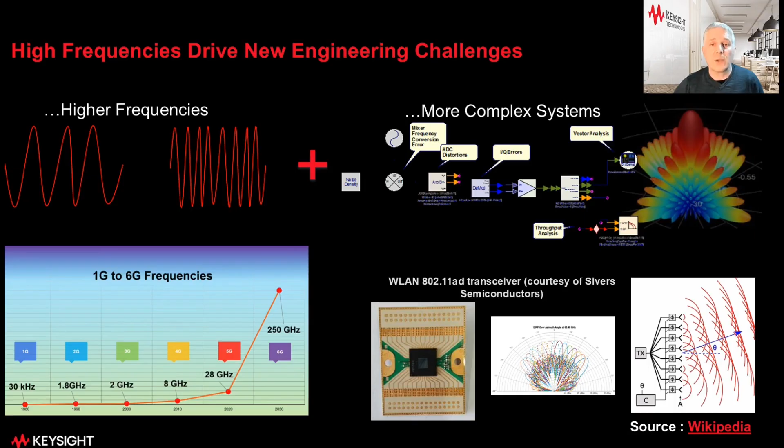As RF design moves into the sub-terahertz and sub-millimeter wave domains, we gain access to massive bandwidth and faster data rates. At the same time, engineers like you face tougher challenges. At these frequencies, electromagnetic behavior becomes more complex, thermal margins tighten, and integration across domains like system architecture, RF design, and thermal design is critical. To meet performance demands in smaller footprints, the industry is rapidly adopting 3D heterogeneous integration, or 3D-HI, an example of which you can see in this picture.

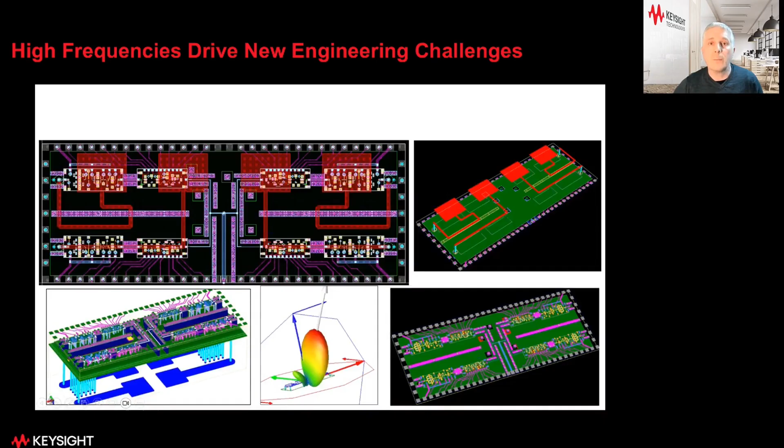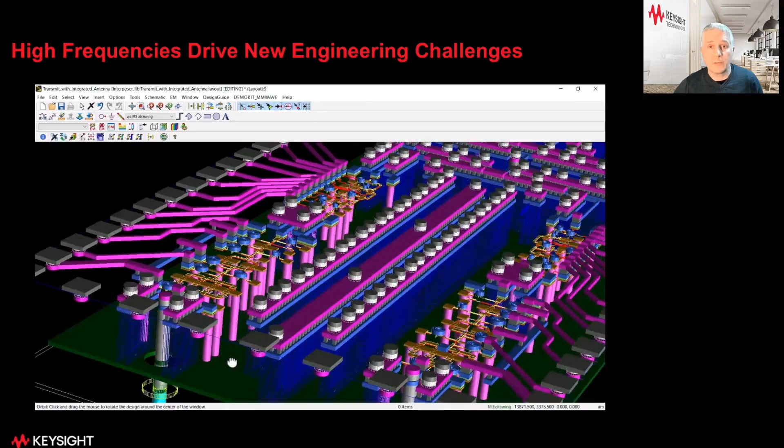This method combines RFICs, MMICs, advanced packaging techniques, and PCBs, often coming from multiple design flows. This enables compact, high-functionality systems, but also makes design, simulation, and validation much more difficult. As integration density increases, parasitic effects, coupling, and instability risks also grow. Electrothermal interactions impact both performance and reliability, especially in systems like satellites where physical access is not possible.

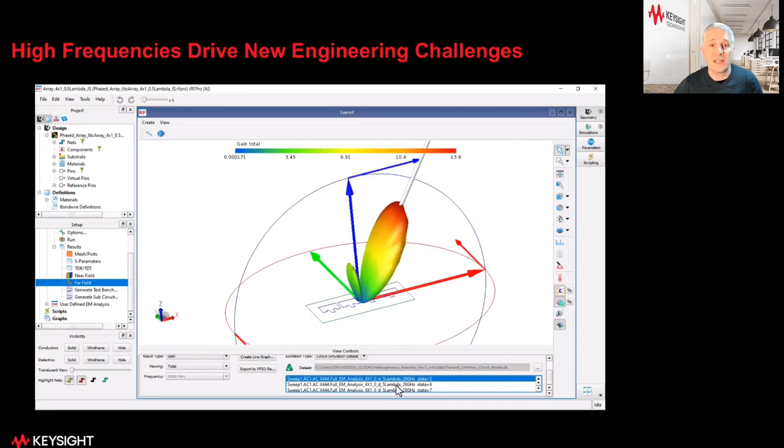Designers must now meet multiple targets, including gain, stability, EVM, ACLR, and thermal safety. They also need to comply with evolving 5G and 6G standards. This requires multi-domain simulation and large-scale optimization across electrical, thermal, and mechanical domains. Traditional methods often fall short. This is where intelligent automation and workflow orchestration can make a real difference, because these challenges are not just technical. They affect how teams work.

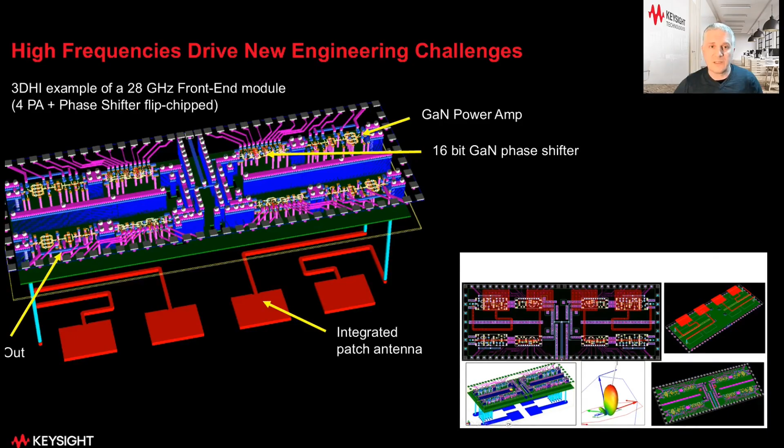To meet today's design requirements, engineers often rely on multiple disconnected tools, which adds complexity, increases the chance of errors, and slows down development cycles. To better understand this reality, let's look at what designers themselves are saying. As you can read on that chart extracted from a survey Keysight conducted a couple of years ago, a lot of the designers are using multiple tools to design their IPs. 6 out of 10 use more than 5 tools.

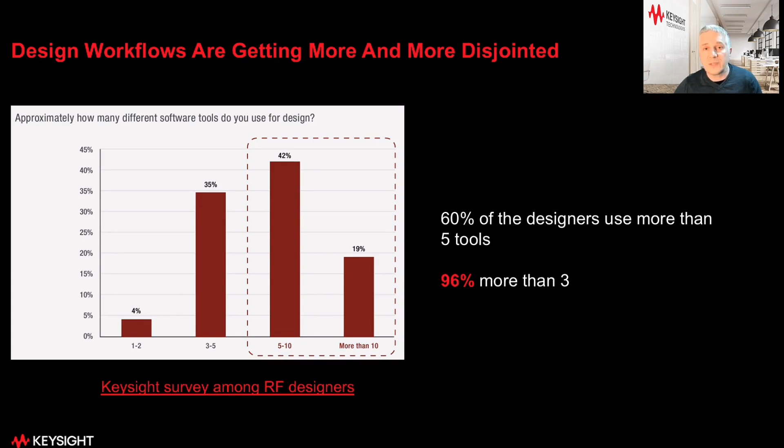That leads to a common challenge that the image below illustrates clearly. Many high-frequency design teams work in isolated environments. RFICs, MMICs, analog blocks, and PCBs are often developed using different tools, each with their own data formats and workflows. While these workflows work well individually, this fragmentation limits collaboration, complicates reuse, and increases the risk of errors or inconsistencies, especially in complex 3D-HI systems.

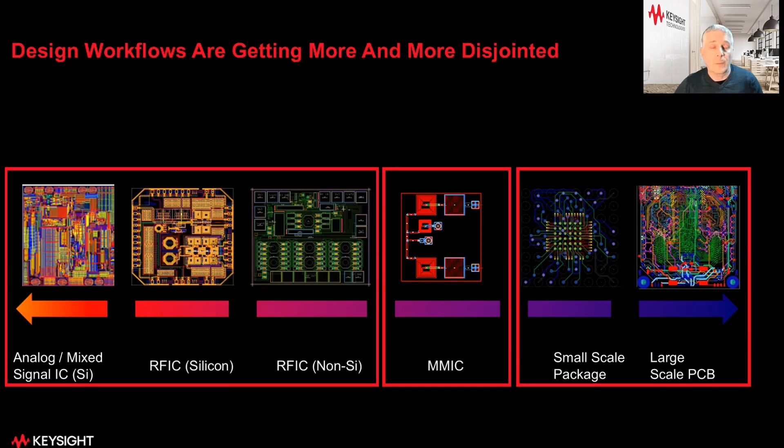This fragmentation is precisely why we created Nexus. Nexus is an integrated simulation and optimization platform tailored for RF and high-frequency design and simulation, built to unify multiple design environments and streamline complex workflows. Nexus tackles these challenges by providing an integrated, cross-platform environment specifically designed for RF and high-frequency simulation.

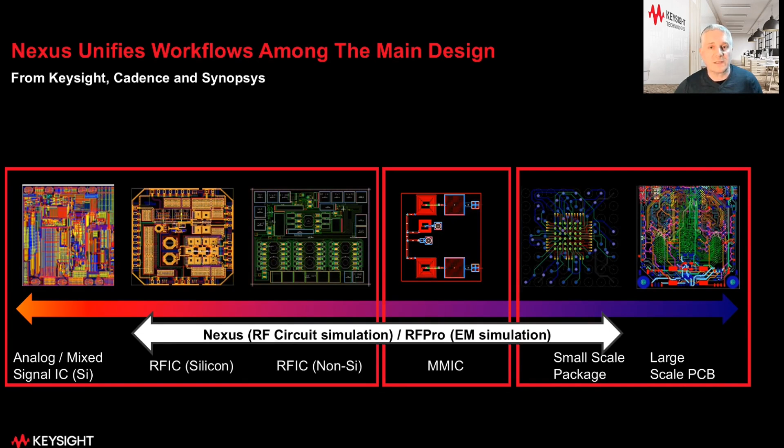It unifies disparate tools and workflows into a single platform, enabling teams to collaborate more effectively and streamline their design process. With Nexus, you gain the power to simulate and optimize across domains and design flows without the friction of incompatible data or tool chains. Now that we understand the motivation behind Nexus, let's explore its core innovation, a user interface that seamlessly connects your existing tools and workflows.

First, one of the most valuable features of Nexus is its native integration with the industry's leading EDA platforms, Keysight EDA, Cadence Virtuoso, and Synopsys Custom Compiler. The user interface and workflow remain consistent across all 3 environments. This means engineers can work in the tool they prefer while still collaborating smoothly with colleagues using different platforms. It eliminates the need to translate workflows or retrain teams and enables better collaboration between RF, analog, and packaging teams.

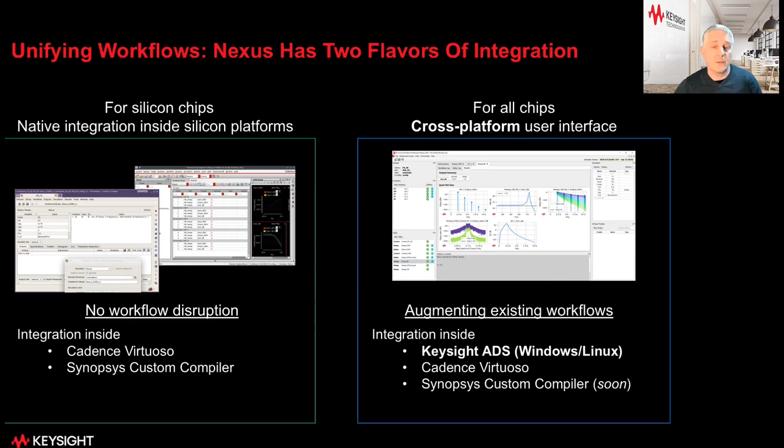Nexus is available in 2 complementary forms, mainly for Cadence and Synopsys Custom Compiler. The first form is native integration within Cadence ADE Explorer and Synopsys PrimeWave, allowing teams to adopt Nexus directly in their existing workflows.

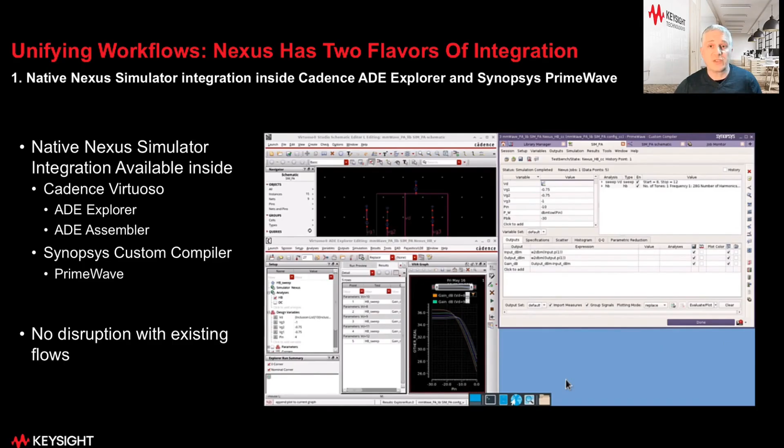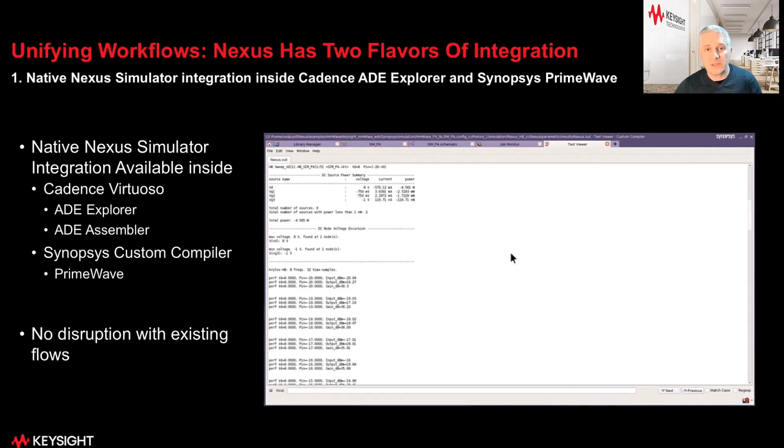As you can see in the video below, Nexus can be used with Cadence Virtuoso inside ADE Explorer on the left and Synopsys Custom Compiler inside PrimeWave on the right. You simply switch to the Nexus simulator and use these tools as usual, with no change to your workflows. Simulations run within these platforms. You can check the log files, you can get the Nexus results, even with the Keysight data display if preferred, as shown here in Custom Compiler.

The second form is a modern user interface that can be launched from within the same environments and also from Keysight EDA. This interface enhances traditional workflows with dedicated RF-centric tasks, providing advanced capabilities while remaining fully compatible with existing design practices. For ADS users, an important change is that simulations are no longer configured directly on the schematic. Instead, all simulation setup and control happens through the Nexus interface.

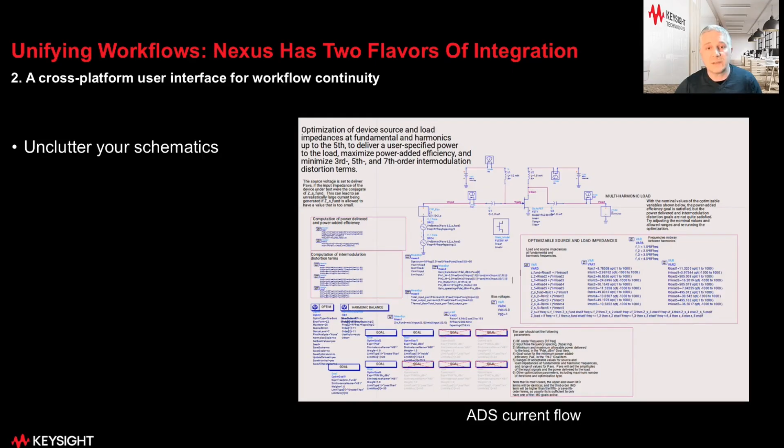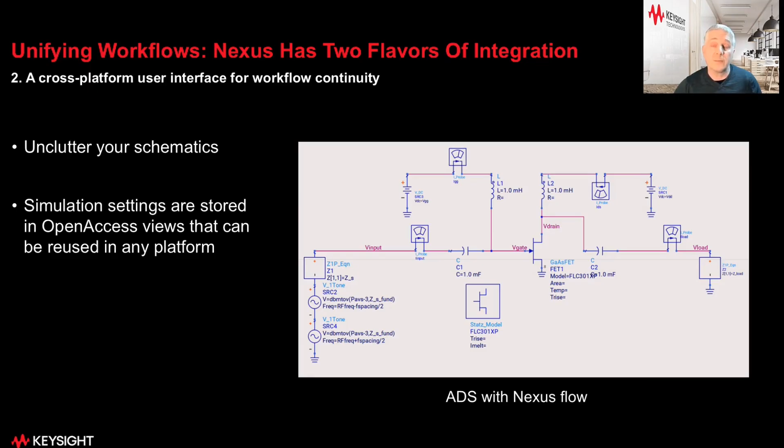This approach declutters schematics, keeping them focused on circuit topology, while making simulation parameters and sweeps easier to access, manage, and reuse. It also encourages cleaner design organization and improves overall workflow transparency. Importantly, it helps ensure that designs created for one platform can be reused on others by avoiding platform-specific components used only for simulation.

Nexus also offers a flexible solution for creating views that can be generated on one platform, such as Virtuoso, and reused seamlessly in ADS, as you can see in the video below. I created a setup in Virtuoso that I can reuse or modify in ADS and then reuse again in Virtuoso. Same user interface, same views, just a choice of preferred platform.

So how does that benefit you? For example, an IC design in Virtuoso on the left can be simulated with the same setup and simulators when the IC is brought into the package in ADS on the right. Or it enables simulation of two ICs, one made with silicon technology within Custom Compiler, for example, and another made in III-V technology using ADS.

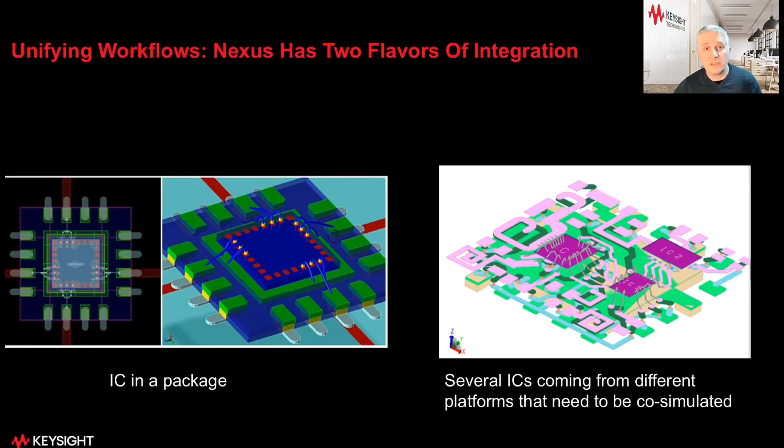Nexus is built for seamless integration across major EDA platforms, allowing teams to work in their preferred environments without losing efficiency. By enabling the reuse of views and data across tools, it supports consistent workflows and simplifies collaboration, especially important in RF-centric design, where continuity is critical.

In short, Nexus unifies simulation and optimization into structured, reusable workflows that reduce setup time, minimize errors, and standardize processes across teams. Now, with this foundation in place, let's explore how Nexus enables powerful multi-domain simulations to provide deeper insights into your designs.

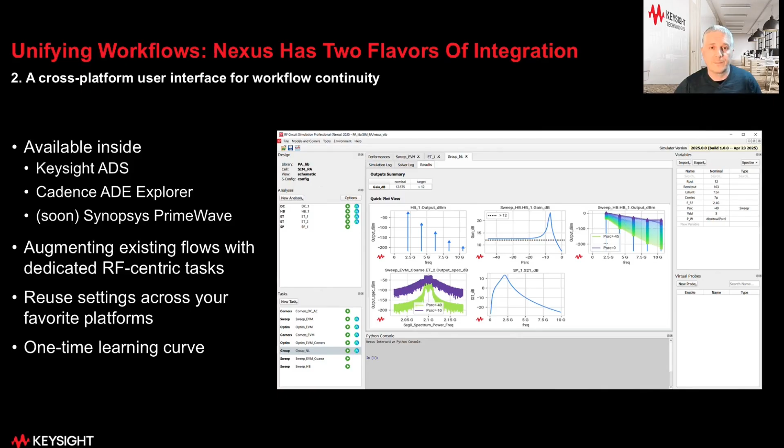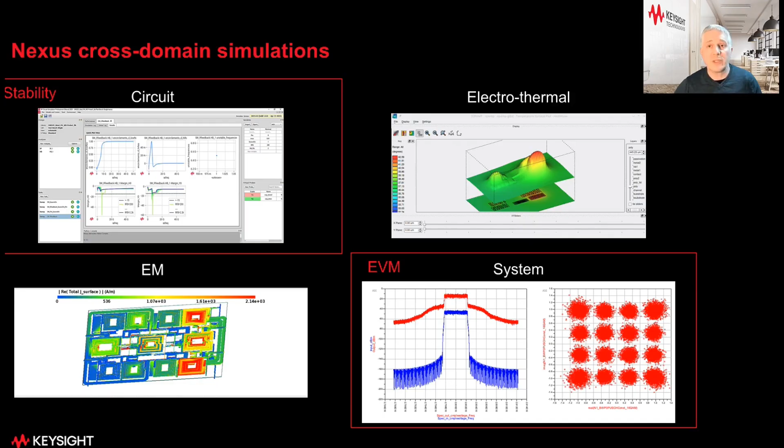Nexus supports electrical, EM, and thermal simulations, enabling comprehensive analysis across all relevant physical domains. For example, the platform can simulate and optimize important circuit-level metrics such as gain, power efficiency, nonlinear stability, as you can see on the image, EVM, and ACLR. Let's focus on two of these in a demo that we believe will be a great addition to your workflows: stability and modulated signal simulation.

We'll start with stability. I won't go too deep into why stability is important. There are many methods to help you determine if your design is stable or not. And that is also the problem. Which method should you trust? And which one provides real insights?

For several years now, we have introduced the Winslow probes, named after Dr. Tom Winslow, who authored numerous papers on stability. These probes are, of course, part of Nexus, with a new and unique addition from Dr. Winslow's papers that I'm sure you'll appreciate. For the demo, I'll go full screen for better clarity, so let's start.

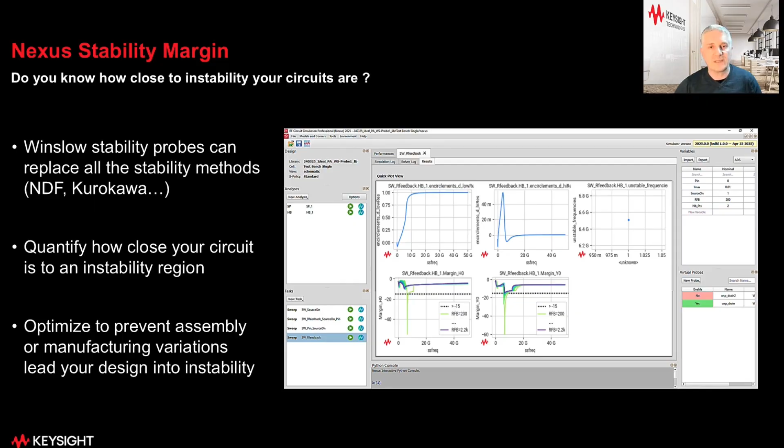Okay, so for the demo, let's analyze this simple circuit. It's a transistor mounted in an amplifier mode, in which we have inserted a feedback resistor between the drain and the gate, and we'll sweep the resistor value to see if the design is stable or unstable for different values of this feedback resistor.

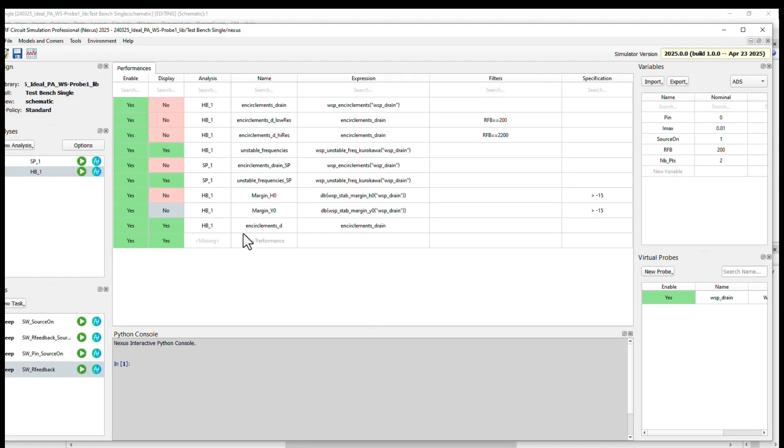So let's start Nexus on this design and maximize it. In that case, we'll look at the sweep of this feedback resistor, so 10 values between 200 ohms and 2.2 kilohms.

So let's run the simulation, which will use the Kurokawa method of stability and the Nyquist stability criteria to detect any potential instability in that design. That's running all the analysis on 500 stability points, and that detects one unstable frequency using the Kurokawa method, and the Nyquist criteria, so the number of encirclements around the -1,0 point.

We see that for one specific value, the lowest value, we get to 1, so there's one encirclement, so the design is unstable, which is basically also what the Kurokawa method gets here with this 6.5-ish frequency being unstable. So that's fine. We know that it's unstable for this specific resistor, stable for the others, but how stable that is?

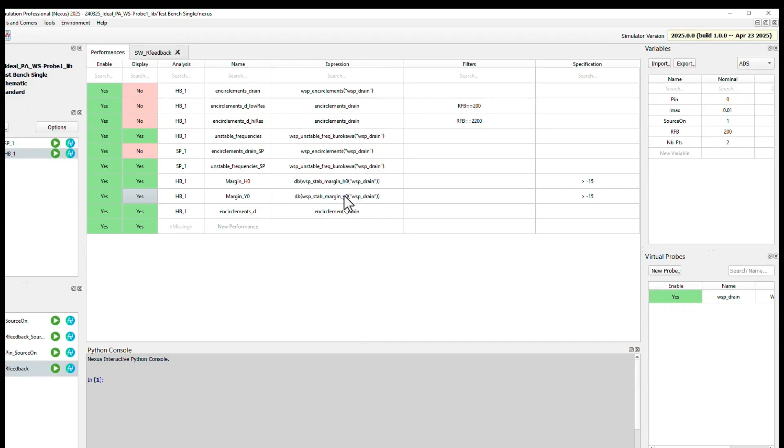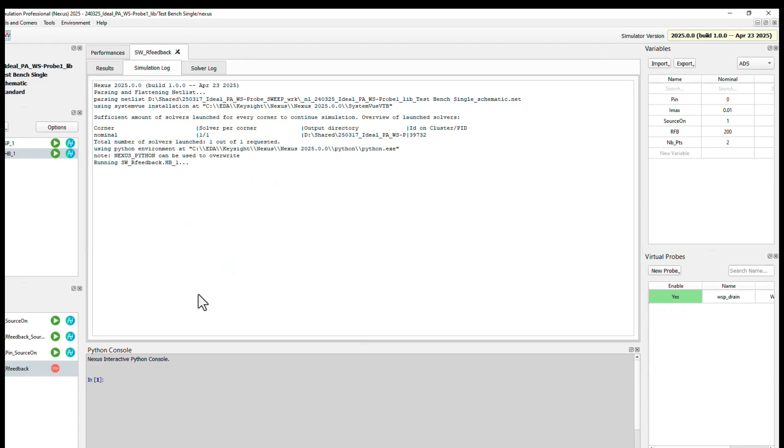In Nexus, you can activate the new computation based on Tom Winslow's work on the stability margin, where you can compute in driving point impedance and admittance the margin that you have for this specific stability. So instead of saying it's just stable or unstable, that will tell you if it's stable and how close you are from an instability.

So here we are, the same kind of curves that we have here, except that we now have two more curves, the stability margin for the impedance. And you can see this greenish huge peak that corroborates that it's oscillating, which you can see also on that area. But we kind of estimate that above -15 dB, you're normally pretty safe in terms of stability.

That depends on plenty of things, but that should be pretty safe.

And you can see that for some other values, though this method is saying it's stable, it's very close to instability. You can see here that you're below that, and some of them are also below that in the admittance version, which means that if you add process impairments, if you add some assembly variation in the manufacturing, there's a huge possibility that what looks stable will probably join that curve and be unstable.

So that gives you a quality measure of the stability. In Nexus, you can now get this kind of subtlety between stable or unstable. It's stable, but then probably that needs to be optimized to get more margin to avoid any process impairment that you can have, making your design finally unstable instead of stable.

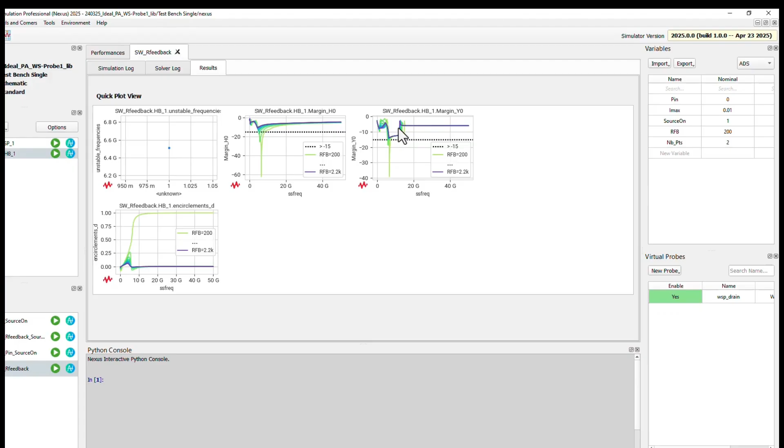Now that we have covered stability, one of the other gems in Nexus is the virtual test benches, which let you see how a device reacts under real-life signals. Why is this more beneficial than classical IP3 or IPN tests?

Latest modulation standards have peak-to-average power ratios greater than 15 dB. Yes, 15. Better to avoid approximations.

Within Nexus, you can embed this test seamlessly and quickly get the system metrics you need to focus on and even optimize, exactly as if you were plugging Keysight instruments inside your design platform, with the same fidelity since the code is leveraged from our own instruments.

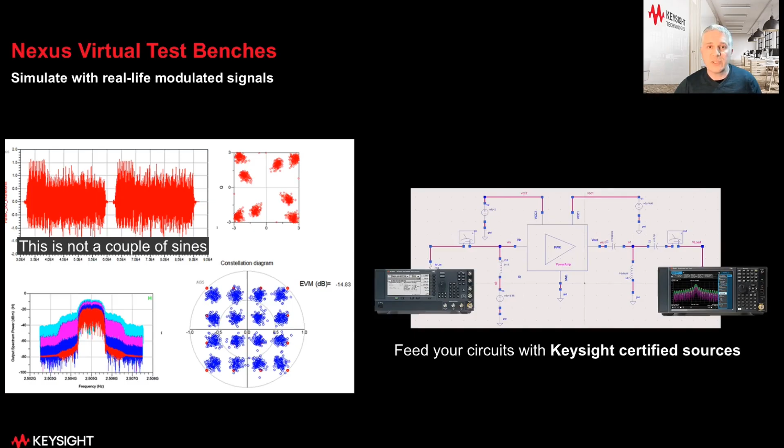I'll now switch to show you how this works in real life in Nexus.

So for this demo around modulated signals using virtual test benches in Nexus, we will use a power amplifier that operates around 2 GHz, in which we will virtually replace this RF input, which is a classical continuous wave input, with a WLAN and a 5G signal, and look at the data here at VLOAD, where we will compute the EVM, the spectrum, and the constellation without touching the schematic.

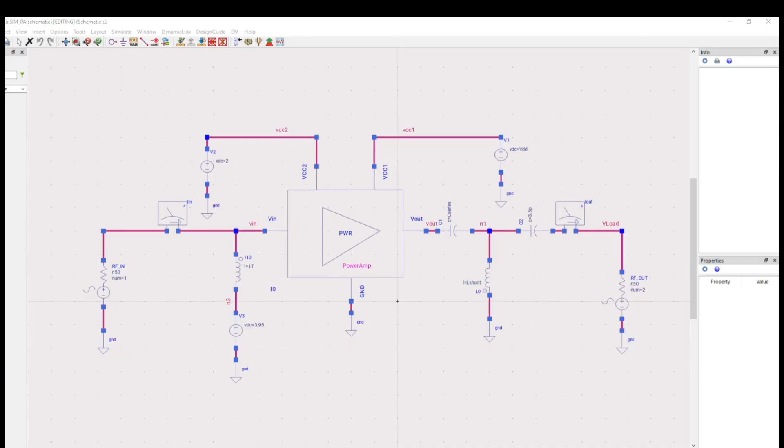So to do this in Nexus, we will run envelope simulations. Envelope is the only algorithm that can handle complex signals, and modulated signals are complex. So we will look at the 5G one and edit the 5G.

So it's basically like if you were putting, instead of RF in, a Keysight source, here a 5G one, and if you were plugging inside the schematic at the VLOAD node a Keysight spectral analyzer, that would be equivalent because we leverage the code between the software and the hardware. So you can change as many parameters as you want for this standard.

The only things that have changed here are the input and output frequency, and the input power, which are the variables I'm using in Nexus, along with the modulation, in that case 64 QAM. So I use the same input and output, though you can use different ones if you're not using something like a PA, for example a transmitter or receiver. If I'm validating these two, I will run the two simulations, WLAN and 5G.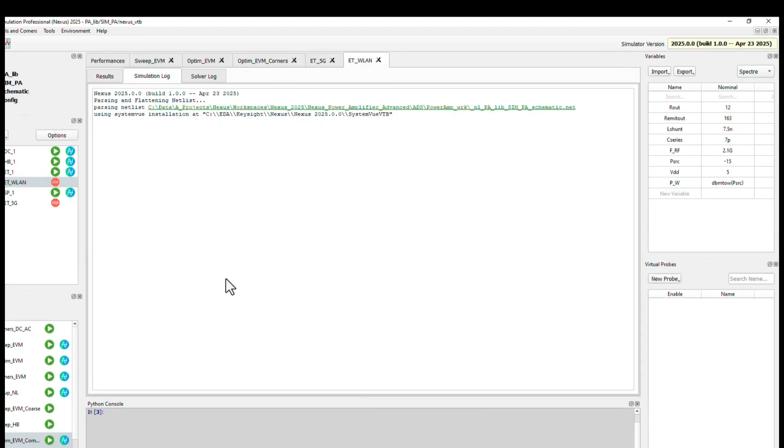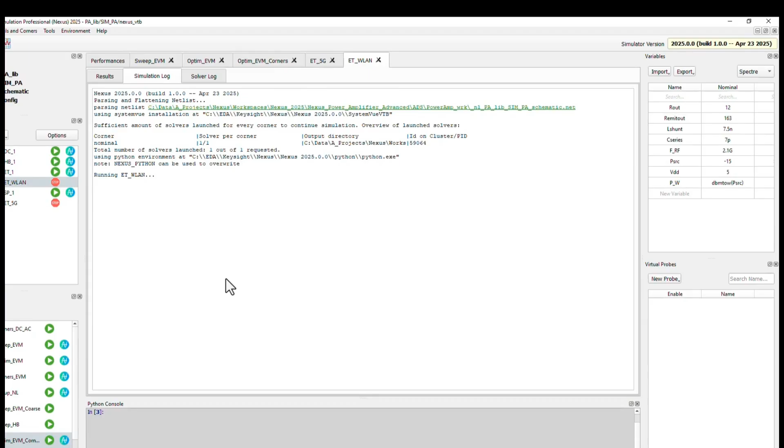WLAN is set up the same way. We are launching SystemVue, our Keysight system simulator, in the background. It's embedded in Nexus, so you don't need an external installation for this, it's already there. Then at the output of these two simulations, we will look at the performances I've defined, an EVM and a spectrum, for each analysis.

So here's the one for the WLAN and the 5G. The data frame is a little bit longer, but should come anytime soon. You see it's okay, quick enough - almost 13% here with a spectrum that is a bit noisy.

And for 5G, it's 10%, which is a little bit cleaner. 10 and 13%, so that means it's very difficult to say we have one EVM simulation, which corroborates the slides I was showing about how dependent it is. If you're using an IP3, IP5, or even IP9 computation, that's an approximation, and these values can range quite widely depending on the type of modulation in your circuit.

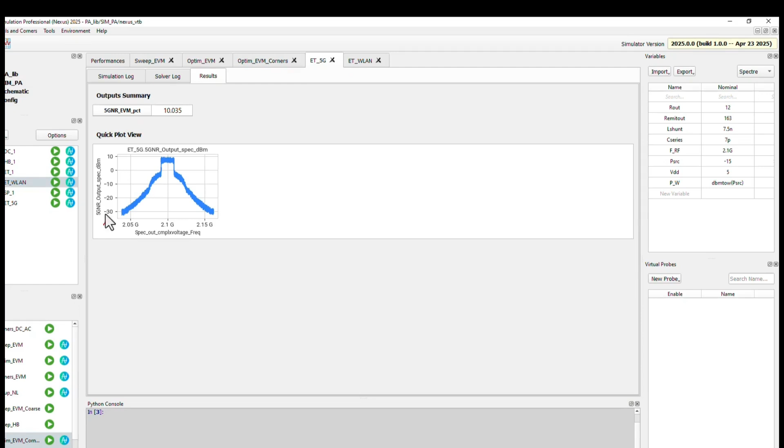Of course, it's a performance, as I mentioned, so if it's a performance, you can sweep it, you can optimize it. Here I did that for DC, S-parameter, and envelope at the same time to get better performances. If you have corners, you can do that on corners as well.

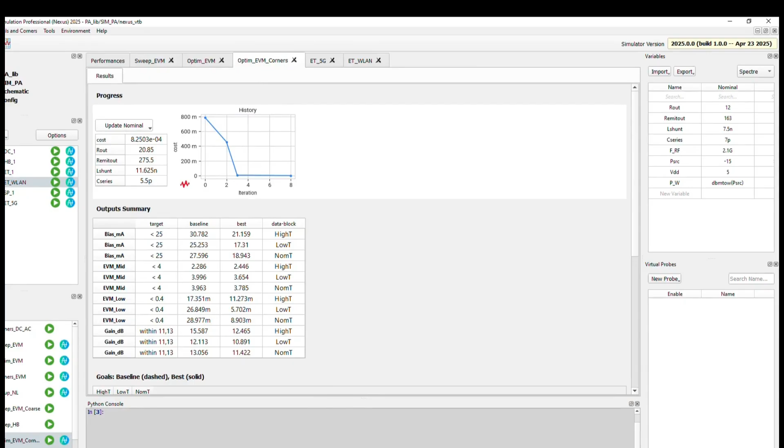But of course you can see much more than this if you want. SystemVue computes a lot more data than you are seeing here, so you can use this and optimize or simulate anything that SystemVue has stored. The EVM I was using is just an example. That's a very quick demonstration of what we can do for modulated signals inside Nexus.

And I will now switch back to the slides.

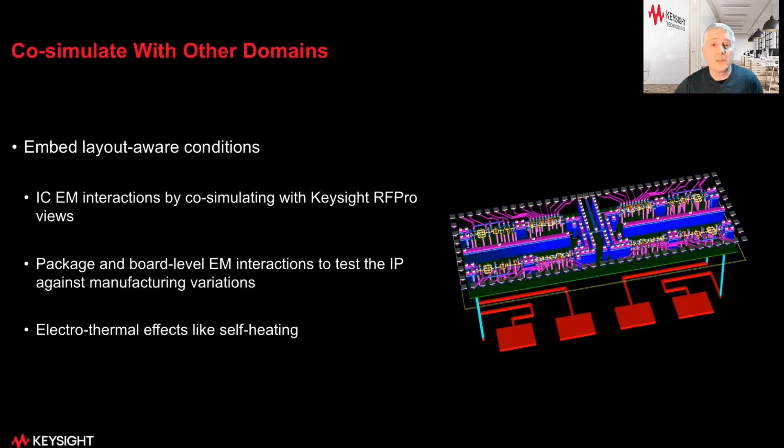On top of these nominal simulations, Nexus can also incorporate environmental and layout-aware conditions, such as IC-EM interactions, where Nexus can co-simulate and co-optimize with EM views generated by Keysight RFPro, package and board level EM interactions to test the IP against manufacturing variations, or self-heating, which you can see running in this embedded video.

For this case, we're looking at an operational amplifier created in Cadence Virtuoso, on which we want to compute the electrothermal profile induced by the layout.

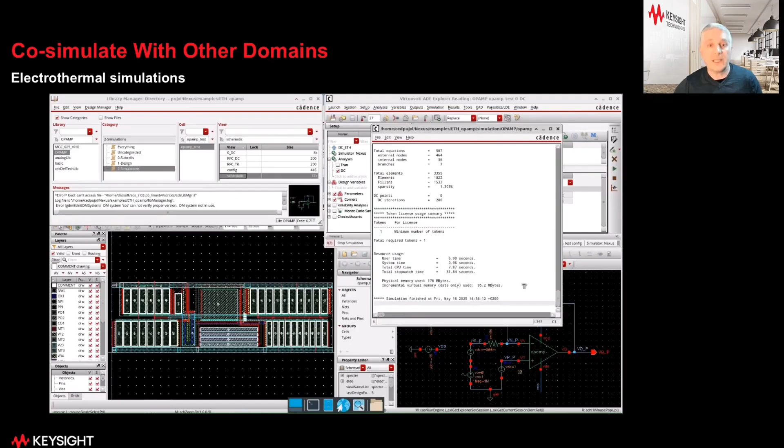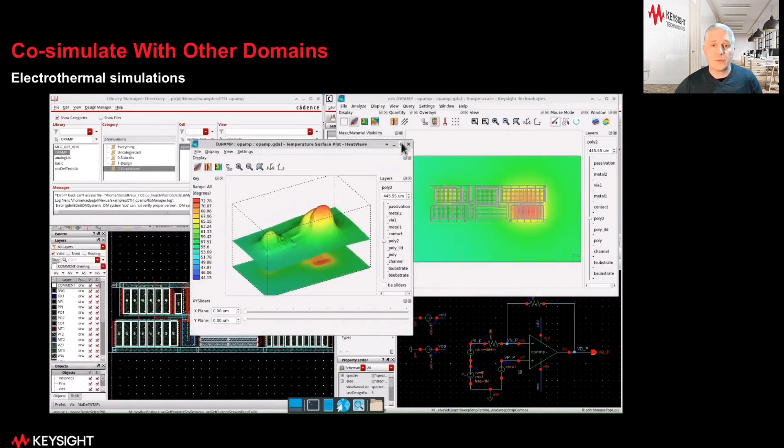Nexus and its thermal solver are feeding themselves internally with the impact of the current operating point on the temperature rise, which then gives a new operating point, then a new temperature profile. It reaches a step where it stabilizes, and then you can assess the impact on the circuit of the current layout and see how the temperature repartition looks like in 2D or 3D over the different substrate and metal layers.

But capturing these detailed effects is only part of the story. The real challenge lies in optimizing multiple, often competing performance targets simultaneously across these domains. That's where Nexus' advanced parallel optimization architecture comes into play.

Nexus algorithms are designed to handle today's complex RF requirements, where multiple interdependent metrics must be optimized across wide frequency ranges and diverse signal types.

Beyond standard metrics like gain or insertion loss, modern wireless systems require evaluation of modulation-specific parameters, such as EVM and ACLR, as already discussed. 5G and emerging 6G standards demand hyper-tight control over spectral purity, linearity, and signal integrity. Using IP3 approximations can make the optimizations harder to achieve due to the margins taken.

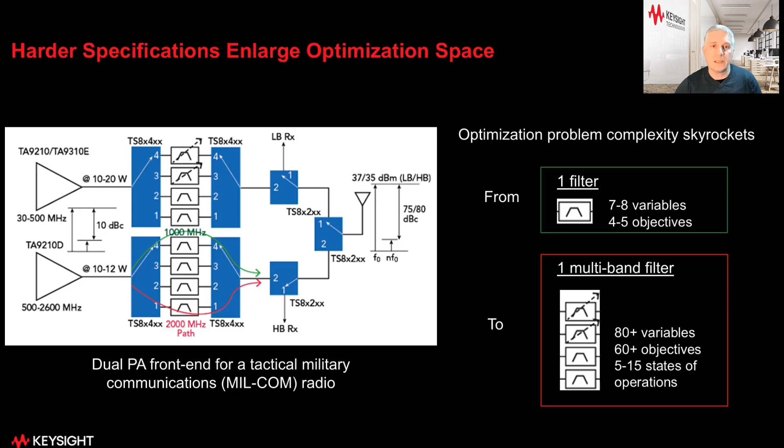Optimizing directly EVM would probably help balance the trade-offs better without over-designing. Naturally, optimizing all these aspects creates a vast and complex design space.

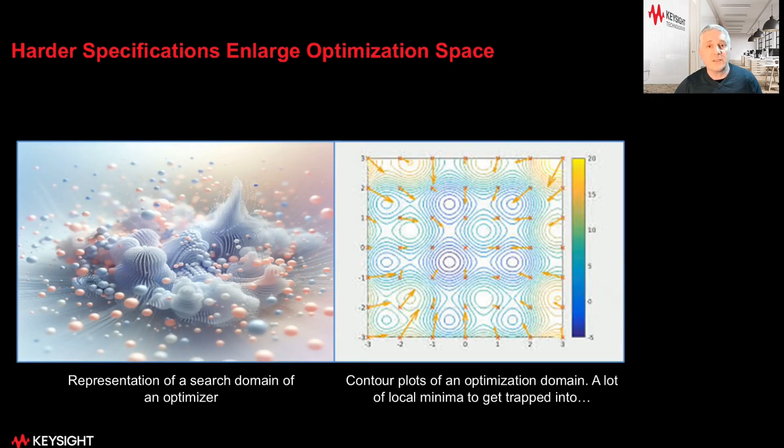On the right, a more conventional contour plot describing all the potential local minima that an optimizer can get trapped into. To address these challenges, Nexus incorporates advanced algorithms: some local optimizers for speed, if your design is well-centered, and some more global that will try to find other combinations better than the current one. These algorithms include a customized version of simulated annealing called Corona, cutting-edge gradient and gradient-free methods, and the highly requested

particle swarm optimization. Let's take a quick look at how Nexus performs these optimizations in practice.

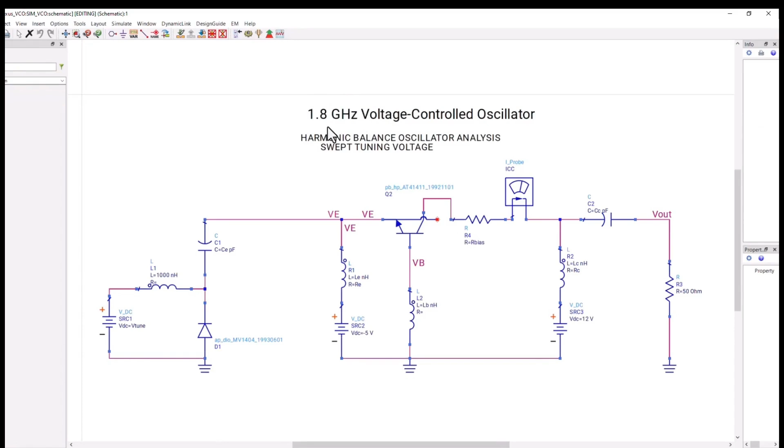Okay, so for this demo around optimization, we will use a voltage-controlled oscillator as a demo vehicle that is supposed to oscillate at 1.8 GHz at the middle of the tuning range.

So if we go to Nexus, I've already pre-canned some analysis and a sweeping task for the tuning range, and also some performances to extract the oscillation frequency and the oscillation amplitude at the middle of the tuning range. The intent would be to have this oscillation frequency very close to 1.8 GHz while maintaining the oscillation amplitude high enough for the future stages in that chain.

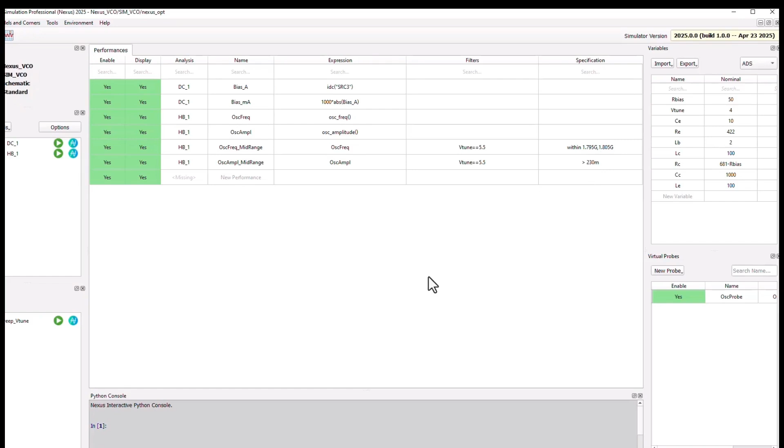So if I'm simulating the nominal simulation, you will see that I'm close to the specs, but not exactly where I want to go. I'm at 1.86 on 1.8, and the amplitude of the oscillation at this specific frequency is very close to 230, but it's not at 230.

So to optimize this, I can add in the task a new optimization, select all the variables that contribute to the analysis. By default, Nexus adds a default 10% range around the nominal value.

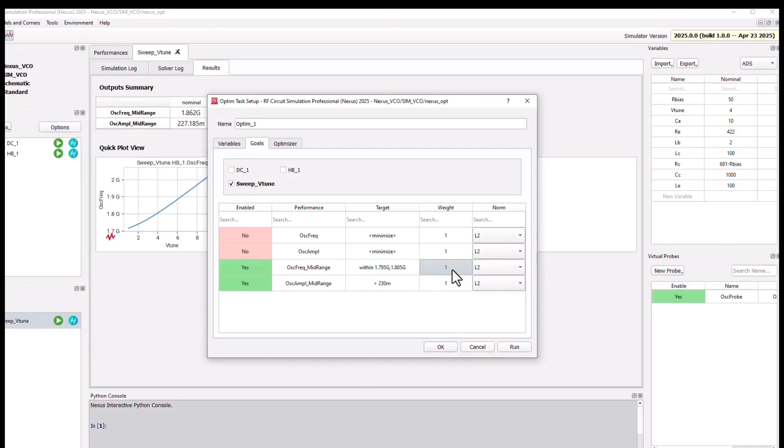Then in the analysis, I will use this sweep because I want to be at the middle of the tuning range, and use the two performances that I've already written. I will put a higher weight on the oscillation frequency because this is the one I'm most interested in. And then after that, I can run the simulation,

and you will see the optimization running. So we get a live visualization of the results where you can see in dashed the original, so the baseline, and in solid the best iteration that we have so far. Nexus already reached the best, at least the targets that we have, with something which is very close to 1.8 and above 230 millivolts as expected.

So fairly simple in terms of flow that you can use. The good thing about it is that you can use that in any platform because it's part of the Nexus platform. That means wherever you're using Nexus, that will be available, and you can use this kind of optimization or all the kinds of tools that you are using in your workflow.

Critically, Nexus leverages parallel computing to speed up this inherently complex optimization process, enabling up to 16 times faster convergence. This means you can explore multiple design trade-offs and iterations quickly, get deeper insight into performance bottlenecks, and reduce your overall design cycle time. On your screen, you can see how Nexus handles the parallelism.

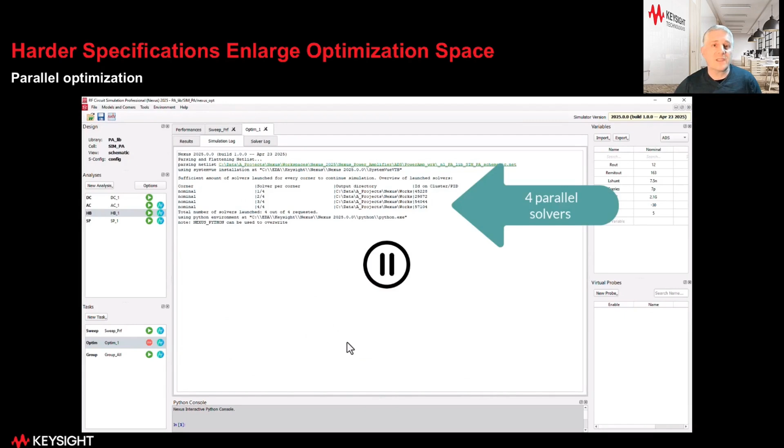If you launch a nominal simulation, I sped up the optimization part for time constraints. You get the optimization in 1 minute and 30 seconds, but you can now use more solvers, 4 in this example, and let's perform the same optimization. I've also made sure the seed is the same to compare apples to apples. But you can now see the points arrive faster and the overall runtime decrease to 35 seconds.

So what can Nexus parallelize? Nearly everything: circuit solvers, parameter sweeps, frequency plan evaluations, and even populations within evolutionary algorithms like particle swarm optimization. It also supports process corners, both foundry provided

You might be wondering, optimization at this scale requires powerful computational resources, and you're right. What about budget? Rest assured, Nexus is designed with your budget in mind by using a flexible token-based licensing system.

For standard analysis, you use regular Nexus tokens, while for parallelism, either from local machines or high-performance computing clusters, you can use cost-effective HPC tokens. This setup lets you allocate resources efficiently and only pay for the computing power you need.

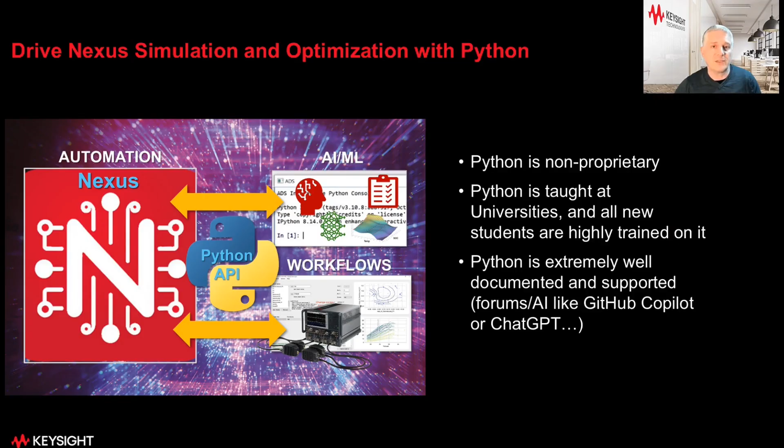Python enables powerful automation. Full scripting access: Python can drive the GUI of Nexus, run simulations, and orchestrate entire workflows, fully automating design, simulation, and post-processing. Headless operation: you can run Nexus workflows without any GUI interaction, ideal for batch simulations, regression testing, or HPC deployment.

Reusable functions: engineers can write and share Python functions for common tasks, like you can see on this VCO post-processing, replacing brittle scripts with maintainable and scalable tools. And the last one is bring your own optimizers. We will be continuously expanding our optimization capabilities, and we'll soon be adding new algorithms such as CMA-ES and various AI-based techniques.

But a common question we get is, which optimizer should I use? To help with that, we've introduced an auto selection mode. It intelligently chooses an optimizer based on problem characteristics, such as number and type of variables, discrete or continuous, the number of objectives you have in your optimization, and other key parameters.

That said, there's no single algorithm that performs best across all use cases. If someone claims otherwise, chances are the testing was limited, perhaps to a single circuit. The reality is optimization needs do vary widely. For example, an acoustic filter with sharp rejection notches has a very different behavior compared to a power amplifier with a smooth gain curve. Even within PAs, a Class AB design and a Doherty PA present very different challenges.

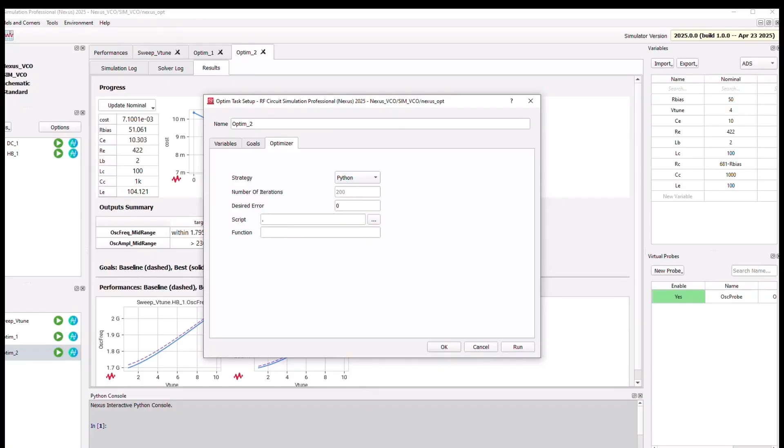So I have something that is already done here. See, it's fairly small. We're talking about 80 lines of code including documentation. There's a class that you can find in our examples that you can reuse at length, because that will be the same one for almost all the algorithms. That is basically passing the problem that you are currently defining in the GUI to a specific function, where we will use an external algorithm to the list that we have in Nexus.

To do this, we will use pymoo, the multi-objective optimization library, hence the MO, that has a broad range of evolutionary algorithms, and we will use the NSGA-II that you are seeing here. That's basically based on an example from pymoo. The only thing that we modified is that the problem that we passed is the Nexus problem that we are seeing in the GUI. So I will copy that script path in the setup here, and the name of the function.

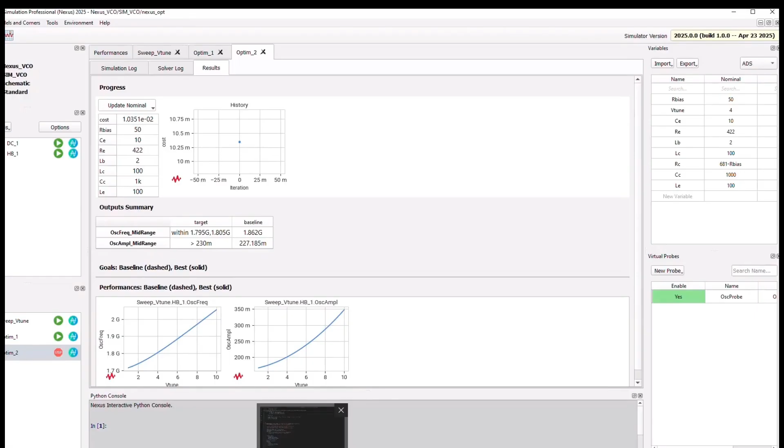And that's all. So once I've done that, I can launch the simulation here, and that will launch the simulation as if it were one of the native algorithms from Nexus. So you can use any specific algorithm that you have and it will basically work. And to show you that it's not difficult, if I want to use another algorithm, I can use another one here. So I will use NSGA-III this time.

So Copilot will help me, cloning what I had, except that it put NSGA-III, and I will show you that it's really not difficult, because if I go to NSGA-III here, there's an example. So I will use their example here, put that inside Nexus. So I will keep the logger.

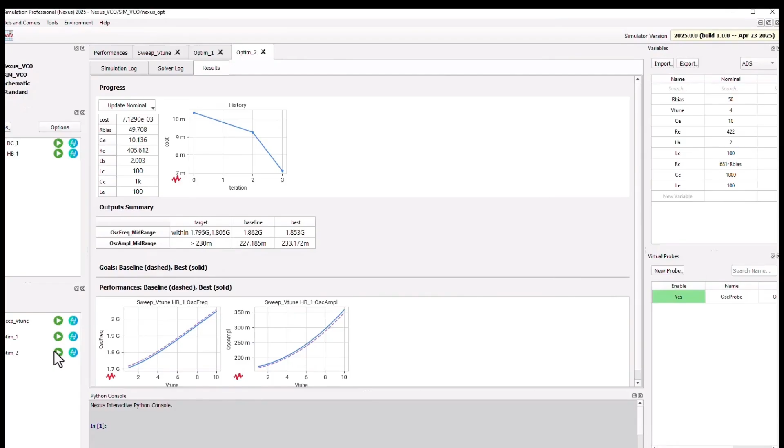And the only thing that I would put is that it's a single objective for this simulation, the population size here. And the problem is the Nexus problem. Done once for all, and now we have NSGA3 that can work exactly the same way. See that started here, and I would stop that one, go here, put NSGA3, and now this time that will use NSGA3.

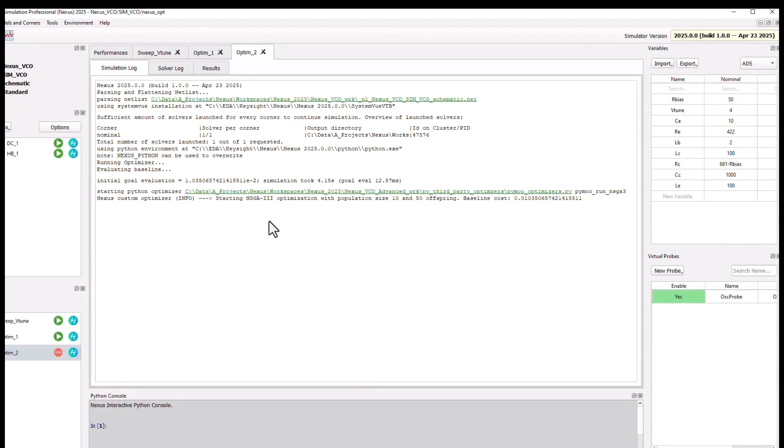So I've basically in less than a minute put the NSGA3 algorithm from pymoo inside Nexus without any problem. So you can do that on your own pretty easily for any algorithm that you like, either homegrown or as I'm doing here with a public library that you can find in Python. As you just saw, integrating your own optimizers into Nexus is not only straightforward, but it gives you complete control over how optimization is handled into your specific workflow.

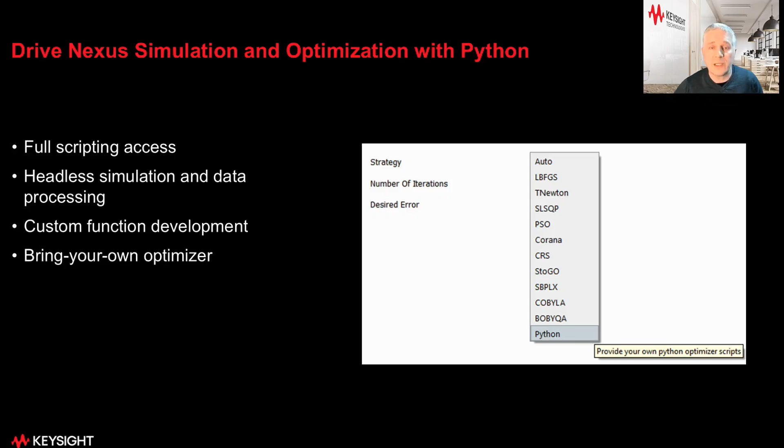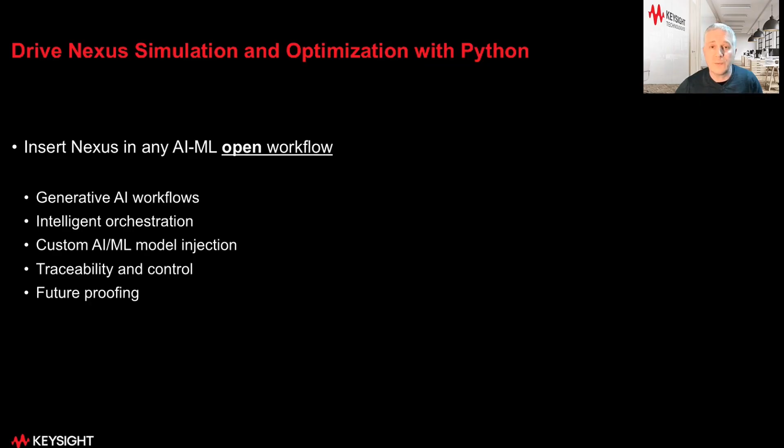But we wanted to give you even more flexibility. Nexus is designed to be AI ready through an open and flexible architecture and framework, not only for optimization, but really to empower users to integrate AI capabilities in a way that suits your needs. Since proprietary approaches do not always align with flexibility, Nexus leverages its open Python architecture to give you full transparency and control over your design workflows.

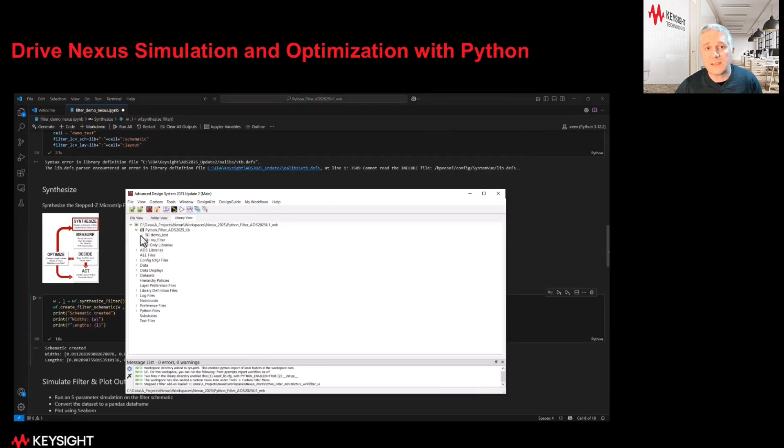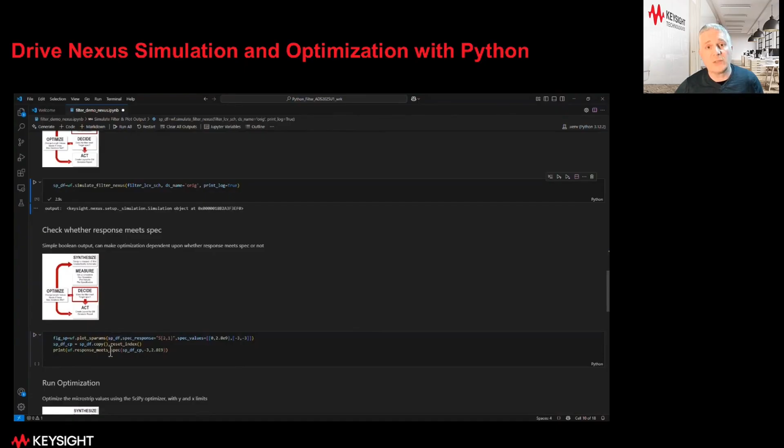On the screen now, you can see an example of this where we drive both ADS and Nexus in a pure headless way. No GUI at all. The intent is to create a stepped-Z filter layout and schematic that will meet some given specifications. We start from theory and check the results are not really meeting the spec. We can do this by launching Nexus and check with a very simple function returning true or false. In this case, as it's false, we can use Nexus optimizers to meet the specs.

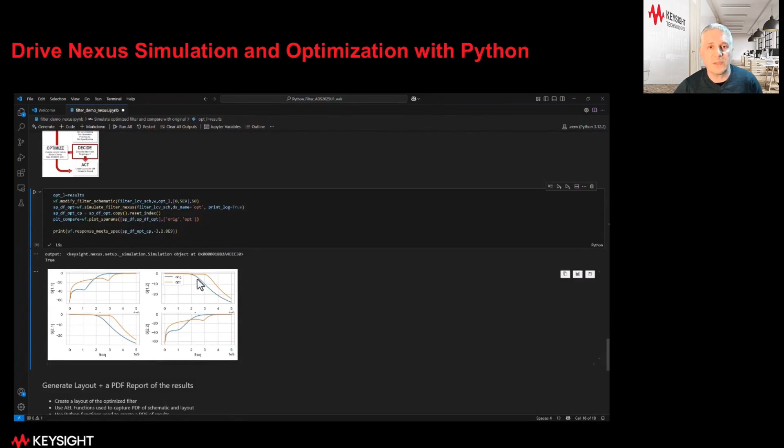After another verification that now matches the specification we had, we can now create a sample report, the final schematic, and a layout in ADS. This very basic Jupyter notebook is only for education, but it shows that you can probably unleash your imagination to create a set of algorithms that would optimize, find new topologies without needing gazillions of mouse clicks.

Today, you can connect Nexus to AI agents or large language models to automatically generate and refine design candidates, and on demand, run simulations, analyze results, and intelligently iterate. You also have the freedom to embed your own custom AI or machine learning models for predictive modeling, surrogate modeling, or learned optimization strategies directly within your workflows. Thanks to Python, engineers retain full oversight of AI-driven decisions with the ability to inspect, refine, or override behaviors as needed.

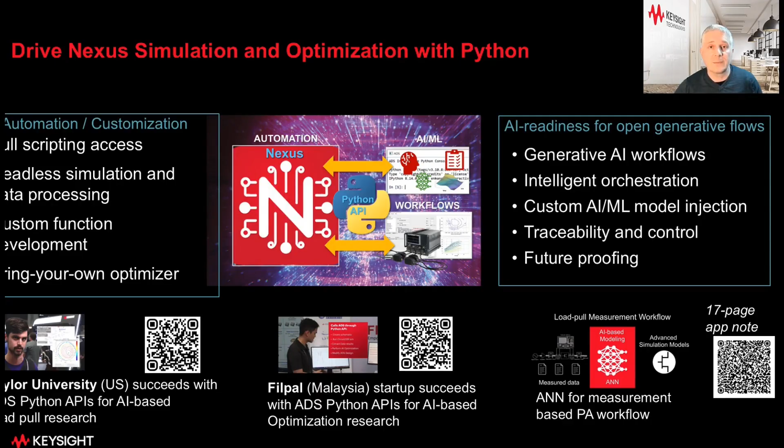Looking ahead, we'll offer turnkey AI-enabled solutions for users who want ready-to-use capabilities, but never without giving up the ability for you to customize them. Whether you prefer a plug-and-play setup or a fully programmable workflow, Nexus adapts to your style. With its Python foundation, Nexus remains future-proof and fully compatible with popular AI frameworks like TensorFlow, Scikit-learn, or PyTorch. Rather than replacing your AI tools, Nexus enhances them, helping you build intelligent and scalable design flows on your terms.

In conclusion, today's shift to sub-terahertz frequencies and 3D heterogeneous integration is transforming RF and high-frequency design. These technologies offer major performance gains, but also introduce significant complexity across simulation domains, design tools, and performance targets. Nexus is built to address this. It unifies workflows, automates intelligently, and supports AI-driven strategies to help teams work faster and more effectively. Whether you're optimizing an RF design, co-simulating a 3D HI module, or applying AI to uncover new topologies, Nexus is here to help you and your team stay focused on innovation, not on constantly fighting complexity.